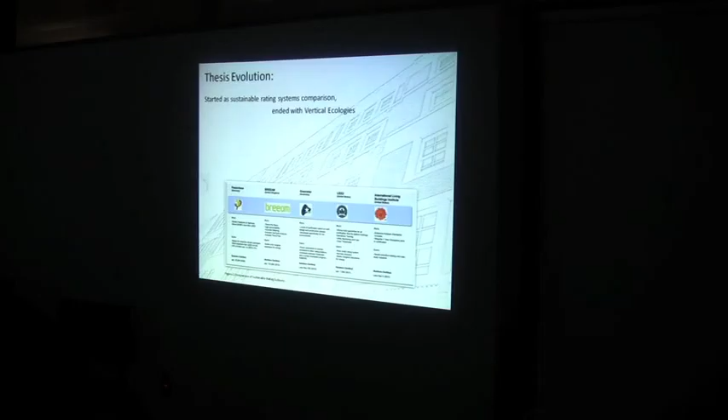The nice part about how I started this for a research methods class was looking at sustainable rating systems. As a sustainable concentration major, I figured there's got to be exciting possibilities and opportunities with this. The nice part is that there are many different rating systems, and none of them go together very well, and they're very difficult to compare and contrast.

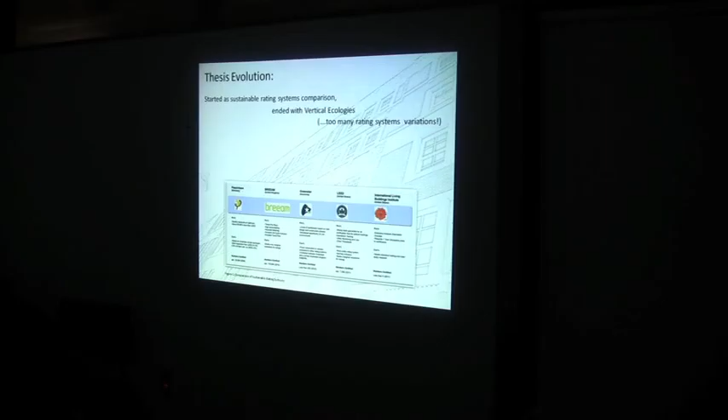So at the last minute, I decided to go with sustainable skyscrapers and wrote the paper, because there were too many variations with the rating systems. I had a lot of fun and started discovering some very interesting and exciting opportunities, especially relating to sustainability.

The nice part is, in starting this thesis, Ed ended up pointing me towards Ila Berman's Sustainable Skyscrapers development that she had with some of her honors kids out in San Francisco.

The nice part was it started the discussion of what is a vertical ecology, as they had actually used network relationships and ecosystems to start looking at sustainability from an entirely different point of view, using interior relationships to extend life cycle.

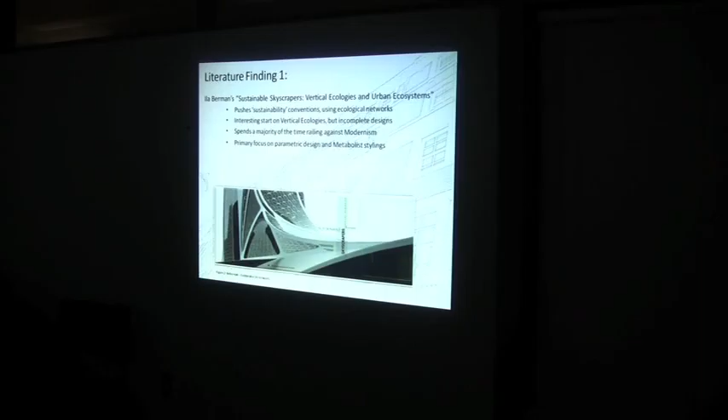Although they had a lot of good starts to this, especially in terms of pushing conventions, a lot of it was actually railing against modernism and focusing on parametric design. Unfortunately, they did not extend it as much as it needed to be done.

So from there, taking these initial findings, I started asking a lot of questions. What is a vertical ecology? What is its purpose? How do we start making these things more efficient? What's the objective overall? Where do they work best? A lot of these questions actually drove the remainder of the research.

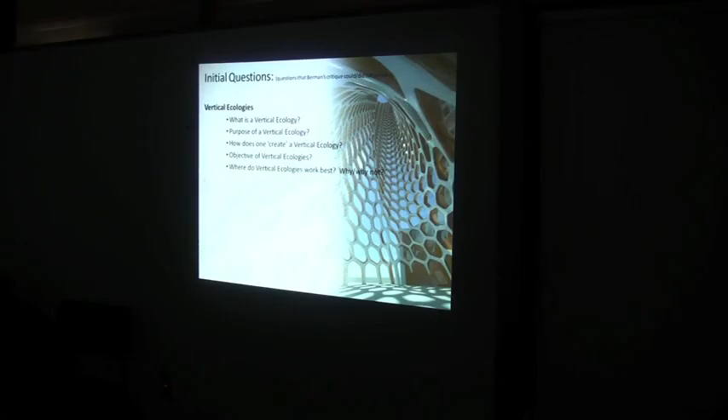So from there, I started looking at some overall concepts going on in skyscrapers right now. There's a lot of concern about the typology, especially in terms of security and safety. But then even more recently has been this development that maybe LEED doesn't necessarily make a sustainable skyscraper.

It's an intriguing concept based off of the Harmon Tower, in which they made a so-called sustainable skyscraper, which is, as we've discussed several times, a vacant structure that will never be inhabited. They're likely to tear it down and destroy it. Does that make a sustainable skyscraper?

As well, three forces in particular—suburbanization, digitalization, and globalization—have combined in the last 30 years to make us basically reconsider the typology as a whole, let alone its relationship to sustainability.

But what's the hope from this overall thesis goal? The Jetsons, the happier lifestyle, everything's easier, but more importantly, that these buildings perhaps can become self-sufficient in times of crisis and danger, but also during economic lulls, so that we can have something that makes these buildings last longer and push through these lulls in the cycle.

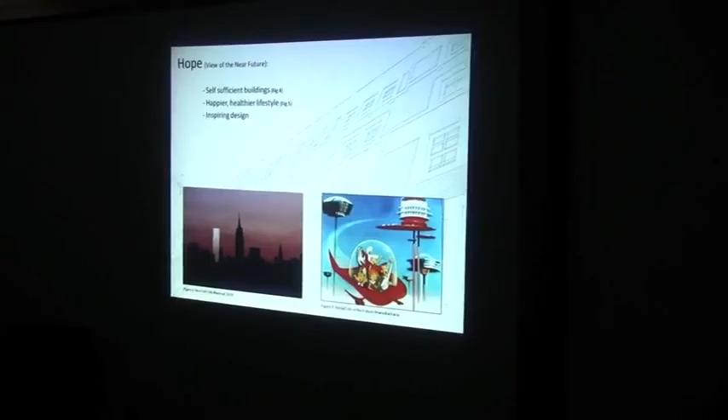But the current reality is that the sustainable skyscraper is a paradox. Though it's incredibly based on performance, it doesn't necessarily guarantee an extended life cycle. Over time, we've actually had oscillations within these skyscrapers—sometimes we've built more of them, sometimes less. But the overall trend is that we're making more of them.

If we're going to make more of them, and we're trying to decrease energy use or make these things more efficient, in what ways can we start to do so? And especially with the increase of telecommunications, what role does the skyscraper have in a world where you can actually work from home?

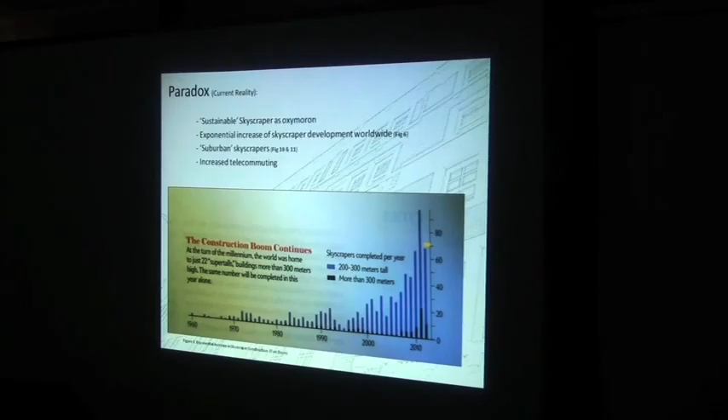So to start with, I looked at the historical oscillations. I ended up stumbling onto the fact that there are 5, soon to be 6, specific energy generations of skyscrapers, all occurring with specific relationships to technology.

My approach to this was to look at how, over time, the skyscraper and its interior relationships actually drove skyscraper evolution. Does it? What I ended up discovering was that, much as shown on the previous slide, while there's economic oscillations that occur that make more or less skyscrapers and impact design, overall there's been other oscillations that directly relate to interior function.

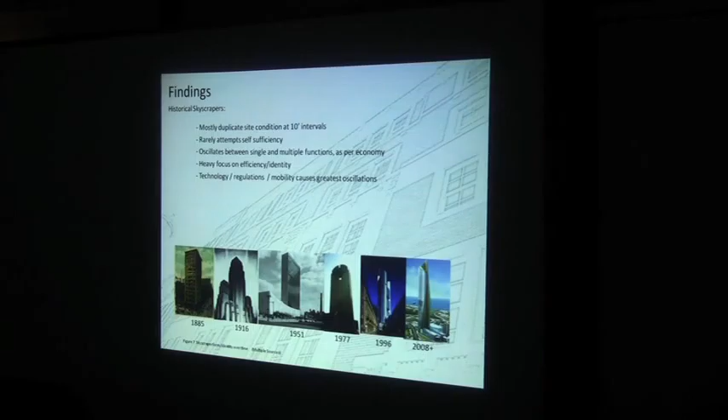In the beginning, skyscrapers were created as a result of technological forces, the elevator, better engineering systems. But it was part of this period of unknowable urbanism where for the first time we were able to build something incredibly tall, incredibly massive, and anything could fit or go within it. So the forces of economics had a great impact on the first generation of skyscrapers. It was primarily categorized by a single use, the business classification, that ended up inhabiting this incredible volume of space. Not only were they the ones that could afford the inner city costs that came with exponential increase of price, but they were also the ones that could physically fill these spaces. The large amount of clerical workers needed to run businesses kept going up exponentially, and this pushed the typology in a certain direction and design.

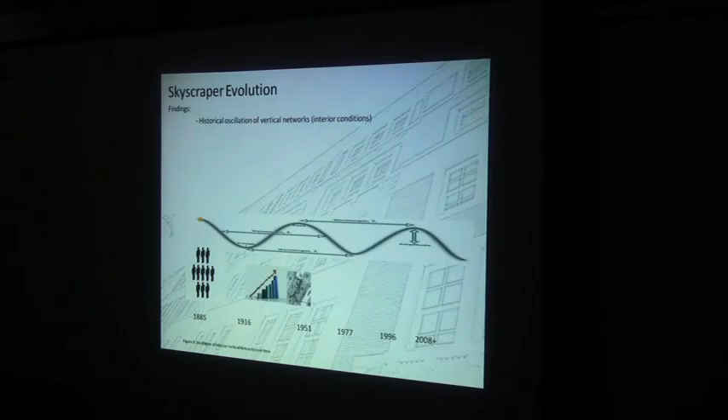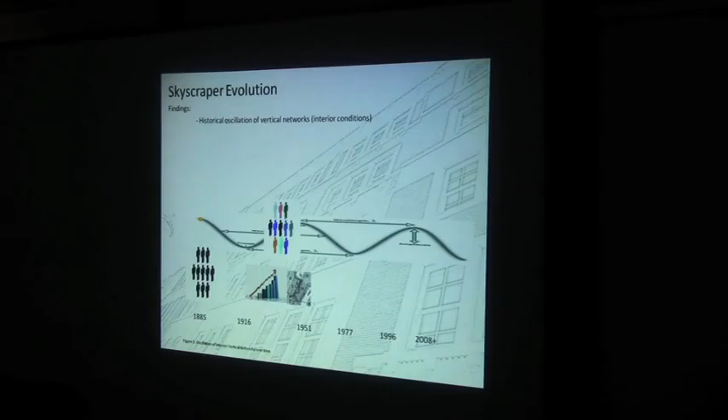The second energy generation came from regulation and increasing size and scope of the buildings. As these things kept getting bigger and bigger, they necessarily started having greater amounts of diversity that were needed even just to break even. So we started seeing a variety of different users, from entertainment such as theaters, and for the first time the public actually started using these buildings and being incorporated. You started seeing the rise of observation towers, so for the first time, rather than the top of these buildings just being mechanical systems, they suddenly had a role for public involvement, which led to different concepts of identity. This also started pushing skyscrapers in a different direction.

In the 1950s, with the development of HVAC, the third generation was born. This was characterized by post-war growth of big business, and also had a direct relationship with the rise of the automobile. This pushed the typology back towards a single-use categorization.

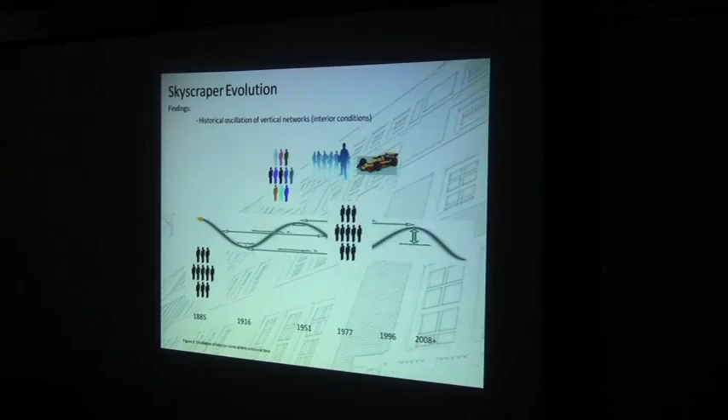This mode lasted for the next 30 years until digitalization and globalization started creating different ways in which we could actually access and use our urban environments. As cities started decreasing in population, people ended up seeing different opportunities and ways they could use these structures. You could actually start not only living in them and commuting to work across the globe, but also using them more energy efficiently. This also started pushing skyscrapers into a different role.

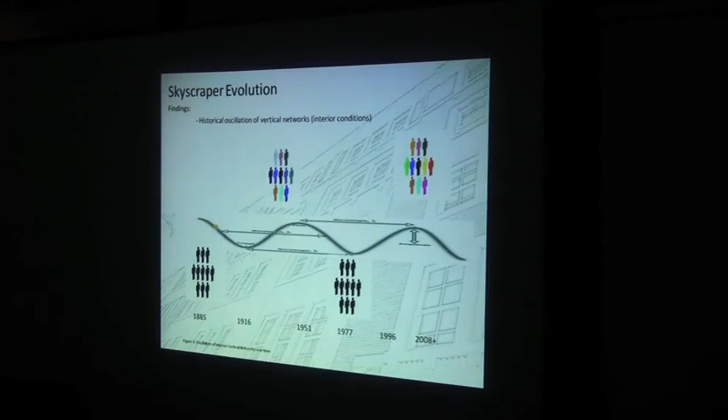Now, over time, this oscillation that we've had, not only for interior program, has gone up and down, but it's been directly affecting energy generation as well. The first generation of skyscrapers only had to generate enough electricity to heat the building and provide vertical mobility. The second generation, due to the formal setbacks from the 1916 zoning in New York, made a less energy efficient building overall. The original form, which was just a square site plan repeated several times, is far more energy efficient because it has less envelope exposure and fewer ways that energy can leave the building. But they also started having greater increases in technology.

The third generation, HVAC, made them even more energy inefficient as you started having incredible demands for not only heating and cooling the building, but also accessing and communicating within it. They kept getting more and more inefficient through the 1970s, evolving even in design, where Mies van der Rohe started pushing this concept of a glass box skyscraper, further increasing the thermal and heating loads on these structures, until the 1973 oil crisis, when you started having a re-examination of energy generation.

Immediately, the results were a decrease in lumens required, which had been exponentially increasing, up until 1996, when you started seeing high-performance skyscrapers paying attention to further reducing energy loads. So we started to see an oscillation back, or down, from this energy generation high. Now the question is, where do we go next? We've had these five different periods, but do we go back towards a single-use categorization, or do we push it up, push the biodiversity, push it to something else?

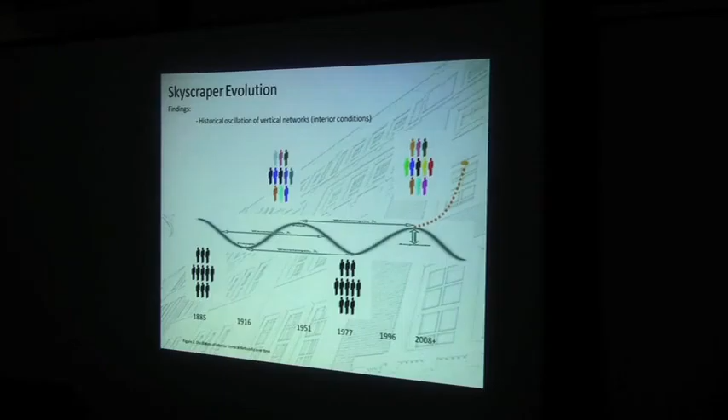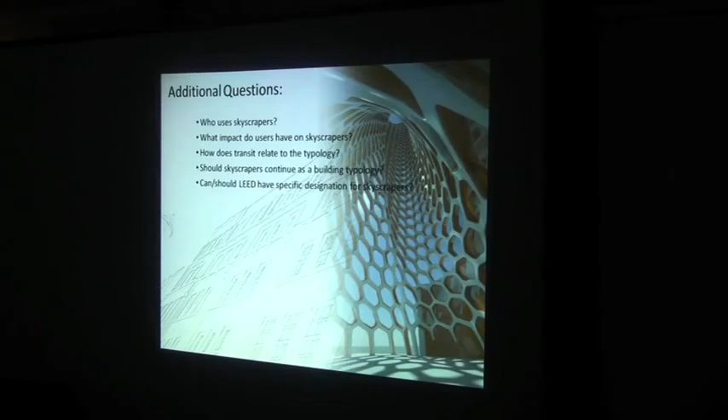Are we right on the brink of the 6th generation of skyscrapers? Now all of this brings up additional questions. Who has used this? Over time it's shifted, but we need to start looking at a more contemporary approach. Who uses the skyscraper, and how does it impact it? How does transit relate to these different functions? Does LEED factor into this at all?

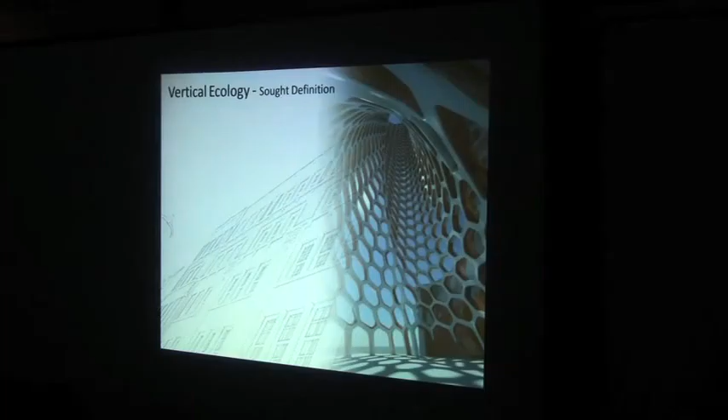To start looking at what a vertical ecology is, I needed to seek some specific definitions. So my thoughts for what a vertical ecology should be are symbiotic relationships, more diversity. Skyscrapers currently can accommodate a variety of different uses and are actually more diverse than they've ever been, but how can we increase that?

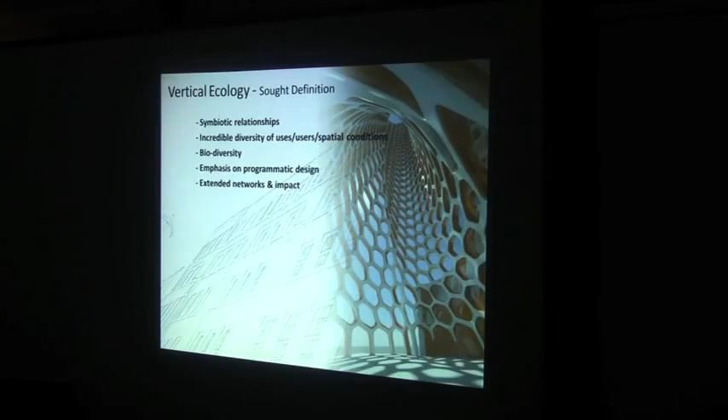Using programmatic design to actually drive the next generation of skyscrapers and using networks to impact the structure. So the second literature review I ended up really focusing on was a thesis by Tom Lee from Harvard, where he started to also question what a vertical ecology is, but how to design it.

In his approach, he took relationships that we understand very well, in this case a horizontal network from a neighborhood he lived in, and then rotated it 90 degrees, hoping to see if the current relationships we understand well horizontally can translate vertically. Unfortunately, they do not.

Once you rotate the streetscape 90 degrees, the whole concept of public and private inverts. Now, to access the building, you have to go inside of it. So the public street space that we would see in a neighborhood becomes the vertical movement, the elevators, the stairs that are inside of the building, which are not that public at all.

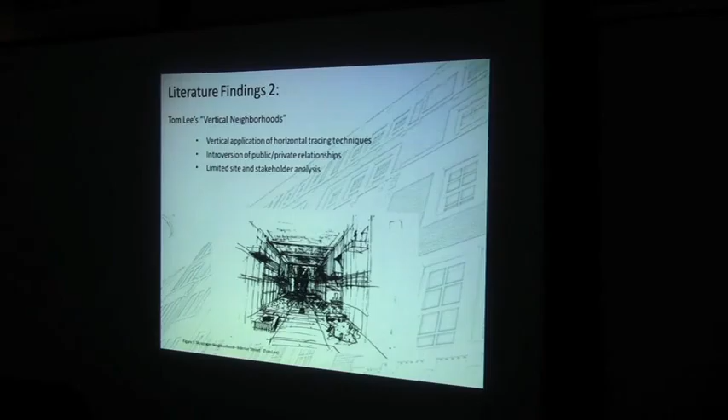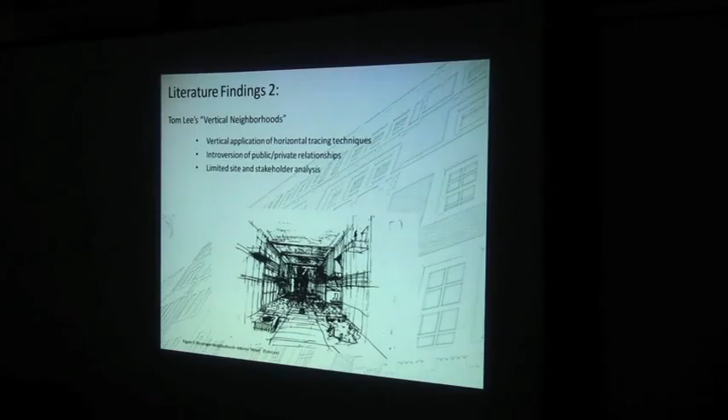The opposite is also true: when you arrive at your destination, the private space, your backyard, will be removed from the streetscape. It would not be as easily seen by the public. But in a skyscraper, that is the outside of the building — the place people naturally see the most.

To further study what a vertical ecology could be, we started looking at different case studies and grouped them into two separate parts. The first is based on performance, looking at concepts of LEED, structural envelope, and how ecology can actually affect it.

Unfortunately, this had many problems. A lot of these buildings are used as marketing gimmicks. Many of them aren't even located in urban areas where this would necessarily work. They're still primarily designed for single users. However, they've also had a lot of successes — they're far more energy efficient than they've ever been, and by their very iconic stature, they challenge our natural conventions.

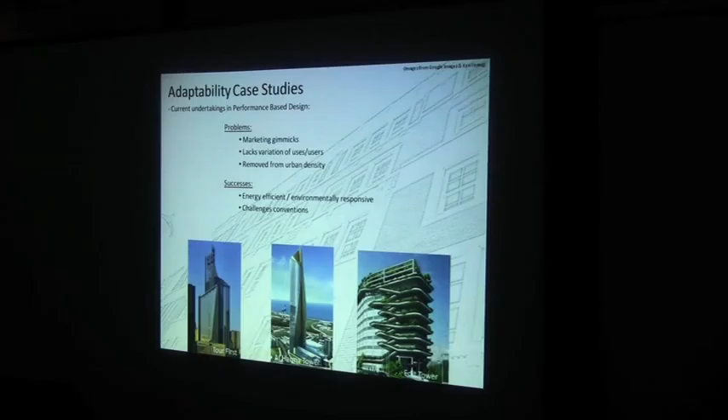The second case study is closer to this concept of vertical ecologies, using programmatic design to actually push the uses of the building on the inside. But this also has problems. A lot of these buildings don't relate their interior functions well — they separate and segregate them too much.

There's a heavy focus on elevators rather than on other types of movement inside the building. Also, in terms of being vertical ecologies, only one example, the CCTV tower, comes close to using different interior functions, but it's a direct relationship more to its political system than to economic realities. We can only create something like the CCTV tower currently in a communist system, which is a heavy top-down approach.

All the other examples, from our historical Pan Am building to our contemporary Shanghai Tower, have still just stacked repetitive stacks of single typology use, broken only occasionally. In the Pan Am case, it works very well as a mobility hub, but does not directly relate to the skyscraper above it.

But the last one, on the far right, this concept of the boulevard skyscraper, a theoretical approach from eVolo, starts to actually seek what we would like to do with sustainable skyscrapers in the future, using a different connections approach. In this case, he created a skyscraper in Paris and used the boulevard to start connecting some of these spaces. The problem was that, starting at the top of the building and working your way down, you could permeate the structure very well.

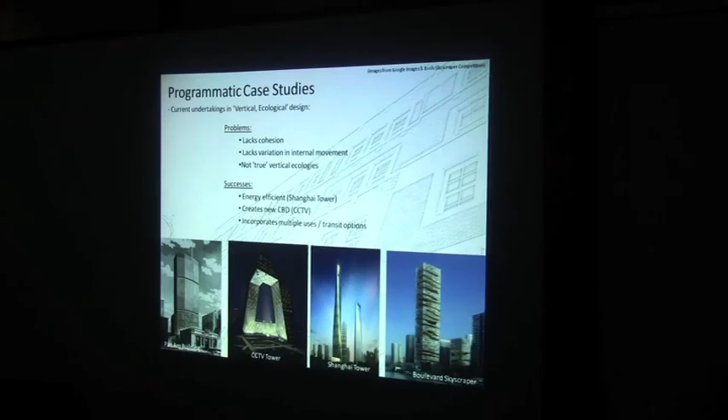But if you were to go up these ramps, it would be very tiresome after a considerable amount of time. But the nice part is that each one of these programmatic designs, from the sixth generation of skyscrapers, has had a lot of success.

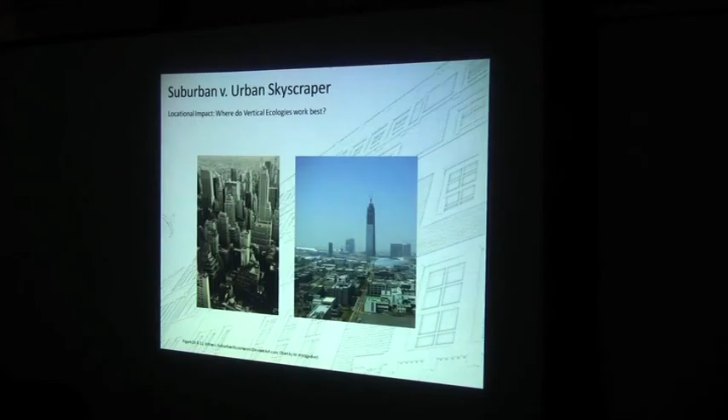The next part is we started looking at where vertical ecologies might work best. I went from one extreme to another—on the left, urban environment, and on the right, the suburban environment. Now, where should we locate these? Well, in breaking down each environment, we started looking at the fact that urban ecologies require a lot of diversity,

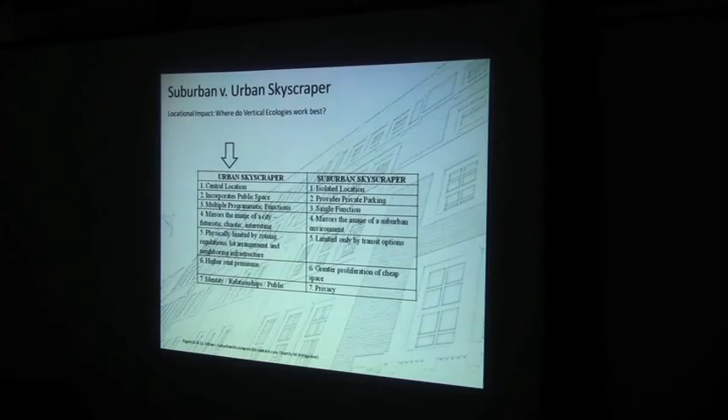a lot of density to start to sustain them. Though contemporary skyscrapers work very well in a suburban setting, as they're very segregated, very reliant on single modes of transit, and cater to a specific type of user, the vertical ecology would lend itself better towards an urban environment, not only in terms of who can access and use the building. But if we were to have public space as part of the overall design, the public space in an urban realm is far more relished, and the identity you would have would be even greater. Though suburban skyscrapers carry their own set of identities, they necessarily relate to the realm in which they're situated, the suburban concept. So using a public urban skyscraper to push identity has far more opportunities.

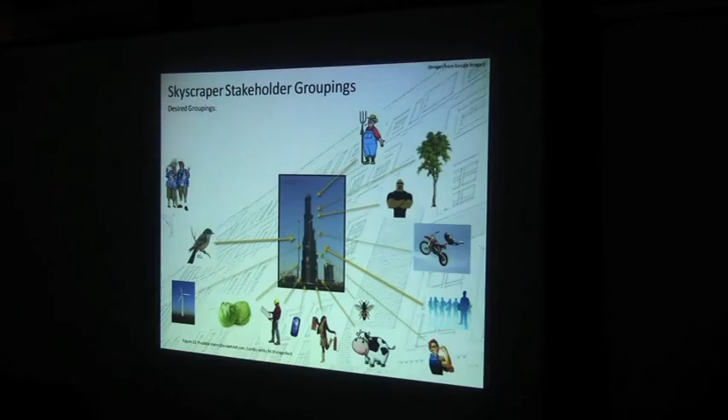Now, who can go inside of these buildings? Currently, as I've mentioned, skyscrapers are more diverse than they ever have been, yet they still primarily remain office environments, when the ability to incorporate a limitless number of users still remains.

So I started breaking down some of the prior slides' images of users into groupings based on similarities. In case of pass-through, you have pedestrians, tourists, commuters—people that would just normally pass through the building and wouldn't have an extended amount of time. Utilizing eight different categories, I started looking at relationships between the two, hoping to use those relationships to push this concept of vertical ecological design.

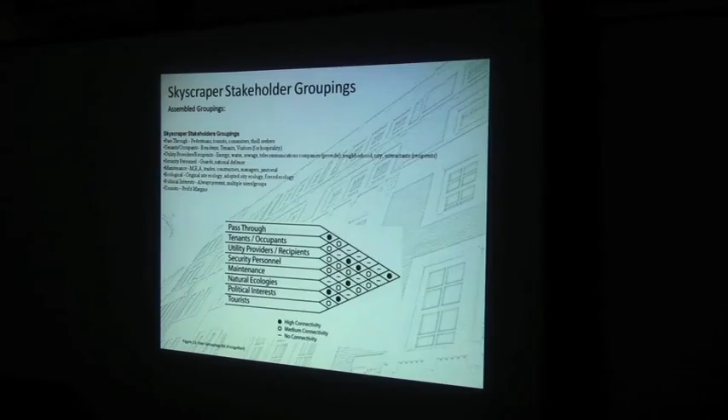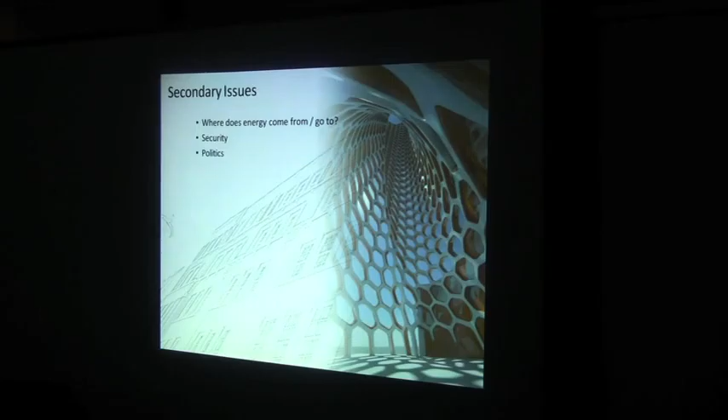Now this brings up even more questions. Where does the energy come from in an urban skyscraper? How do we keep these things secure? The impact of politics, transit, yet again.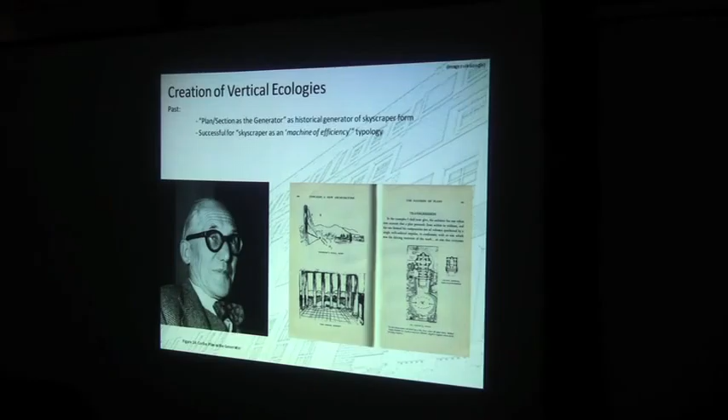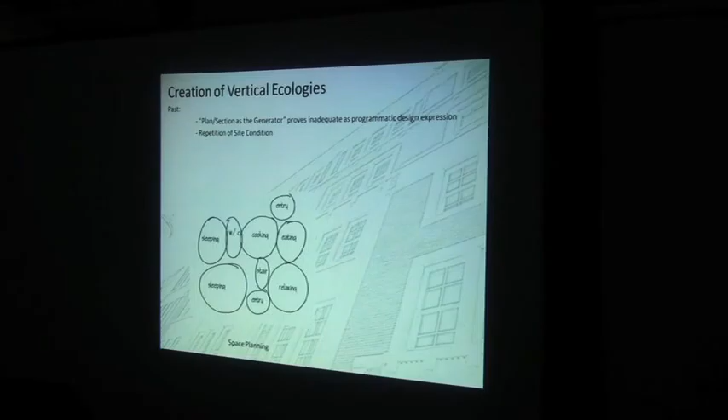But this has shifted over time. They're not adequate for programmatic interior design because all they end up doing in terms of spatial relationships is take spaces that we understand and relate to very well in one dimension, and then repeat them as many times as necessary to be economically profitable.

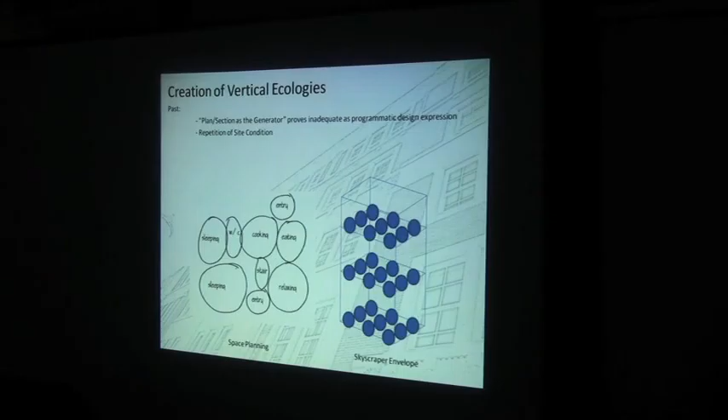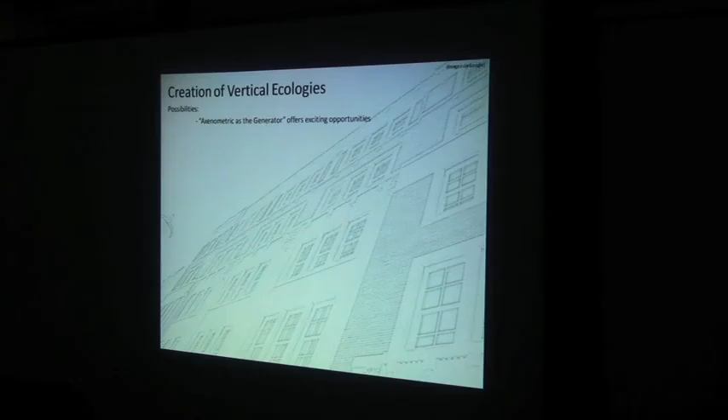But to create a true vertical ecology, we need to start thinking about how to create or generate them differently. And axonometric design offers exciting possibilities. Currently, architects are designing very well in three dimensions because of the computer. However, we're still primarily a two-dimensional field. We cannot—even though we can conceive of spaces in 3D—we still rely on the pen and the paper to actually convey these ideas.

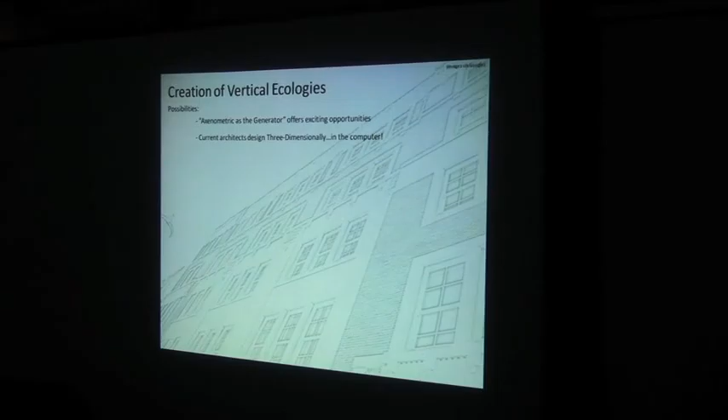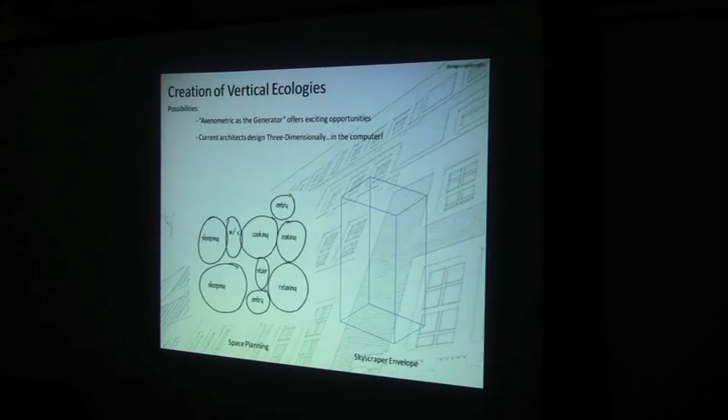And axonometric design takes the concept of the section and or plan as the generator and then turns it into an isometric, so we can take these same space-planning concepts that we understand very well, but then situate them within the skyscraper completely differently, and start focusing on how relationships between these spaces start creating the overall design.

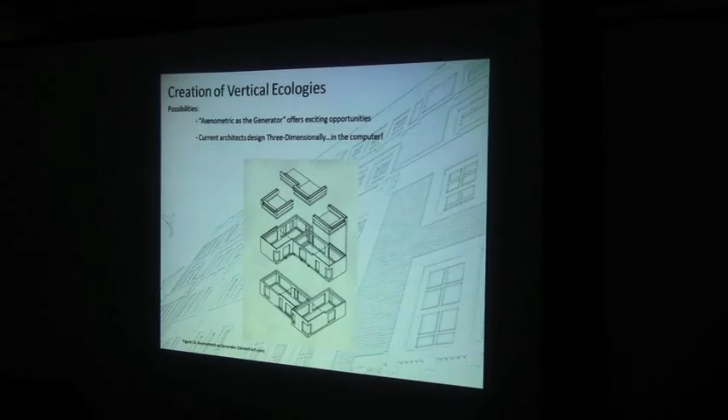So overall, this offers incredible exciting opportunities for the 6th generation of the skyscraper. Now these connections that would link these different relationships then become incredibly important. In this case, we have 3 that exist in various forms of success, and we understand them very well: the slow, the medium, the fast, using stairs and escalators to access different parts slowly, and express elevators to get to the top much quicker.

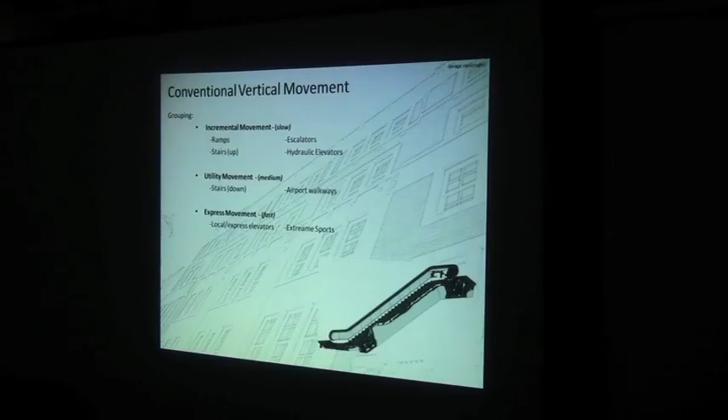But unfortunately, for vertical ecologies to work, the medium way to almost quickly move through the building yet still see things and not be hindered by unaccess becomes more important. Currently, stairs and/or airport walkways are more of the approach that we conventionally see, but we need to start thinking about this perhaps a little differently.

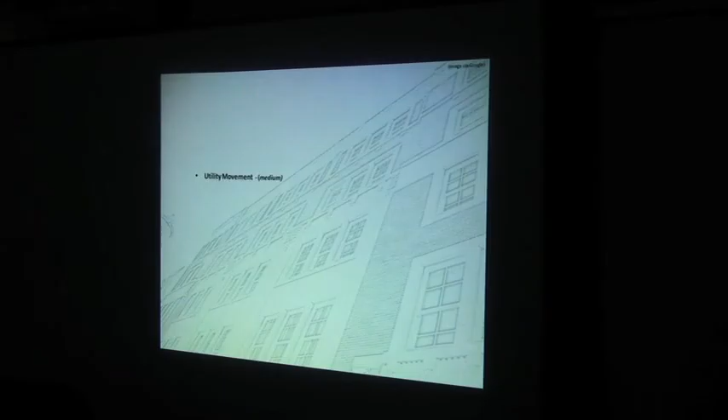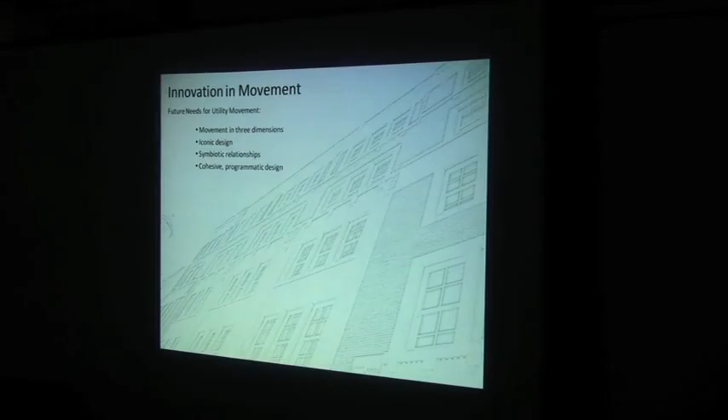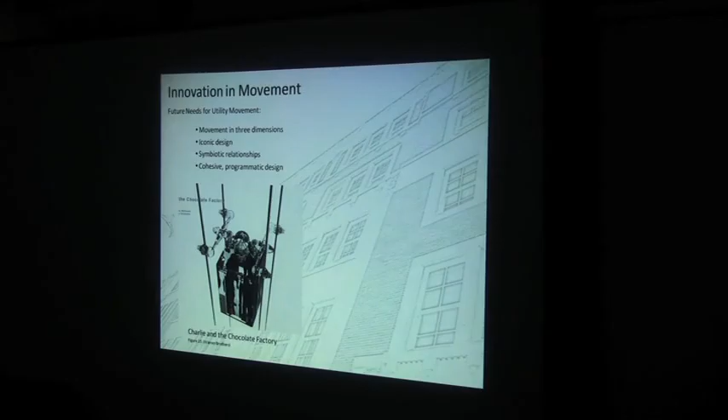Now the neat part is that some people have come up with different ideas of how to move in 3 dimensions, how to start creating symbiotic relationships through movement. And though some of these are necessarily science fiction, they start actually addressing some of these questions. So in the case of Charlie and the Chocolate Factory, having a space that can move in 3 dimensions and link - an elevator shaft that actually expands and contracts to connect spaces but not be limited by the elevator.

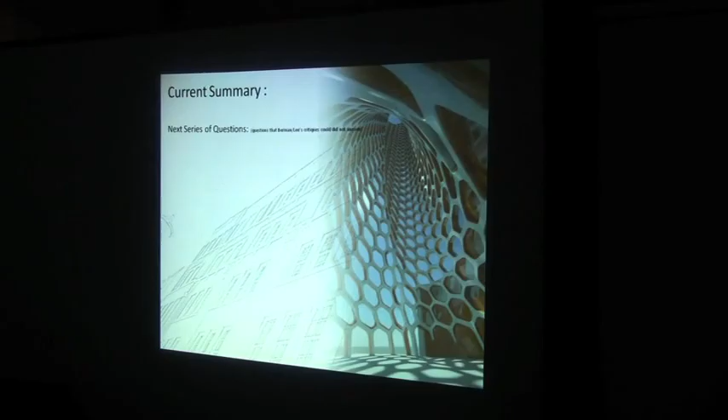And in conclusion, I come up with even more questions as to the next phase of where we go with the vertical ecology. Though we're starting to see an understanding of relationships, we're not necessarily sure how it looks. How do we start filling in some of these spaces? What other purposes can we have? And then how do we create successful relationships? Just because we can identify certain relationships now does not necessarily mean that in the future these same relationships will exist. And how do we create cohesion in an urban environment, if that is our place to select? There's a difference between a downtown, a midtown, and an uptown, and each one of these can be studied more in depth.

So the next part that we will start to focus on will be through design. And I'd like to thank you kindly for your time.

Thank you kindly for your presentation. There we go. Oh, I can jump back, obviously, in the presentation. Mm-hmm. Or we shall, I guess. Oh, thanks, Mark.

It was very well presented, very clear regarding your position, your current state of your thesis. I think it was provocative. I think it was - your thoughts are well organized, but it leaves me with even more questions than the questions you left yourself with.

I guess a couple of questions. What is your working definition of ecology? I would say that biodiversity seems to be - all these different terms, relationships and networks and ecologies - I've been using them interchangeably throughout this whole thesis project, and I know we've had several discussions now.

Okay, what does this mean? Refine it, explain it better. In terms of a rough understanding of ecologies, I would say that it's network relationships that are symbiotic, that help build on one another rather than tear each other down. Symbiotic network relationships.